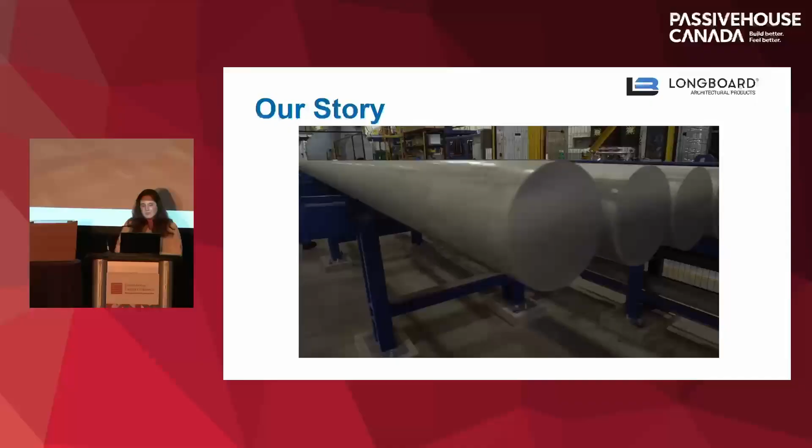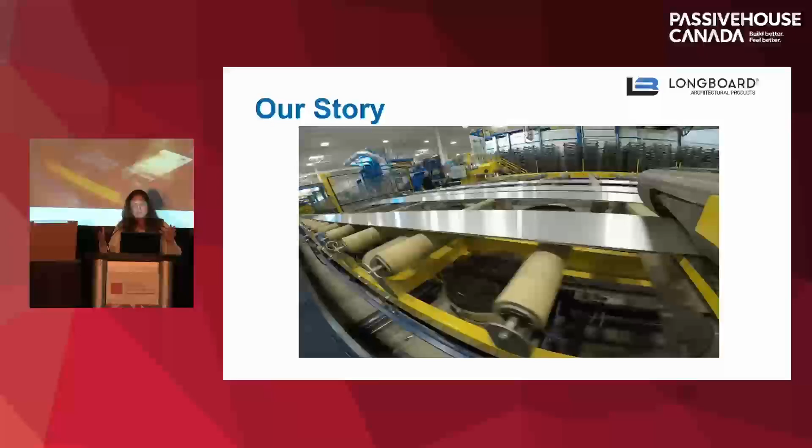This is our manufacturing facility in Abbotsford. This is the extrusion line. We get a log of aluminum, we cut it into billet. The billets get heated up and they go through an extrusion line. On the other side, we have the extrusion shape in 100 feet. We stretch it, we cut it into 24-feet pieces.

We powder coat everything, and the wood grain finish gets wrapped. This is the powder coating - we have a vertical paint line, and then whatever needs to be powder sublimated for wood grain gets wrapped in a film, goes into the oven, and by sublimation process we transfer this image into the planks or the profiles. So this is every step of our manufacturing process: the extrusion, the preparation - so we make sure the aluminum will receive all this powder and sublimation process and it won't come off - then the powder coating, and finally the sublimation.

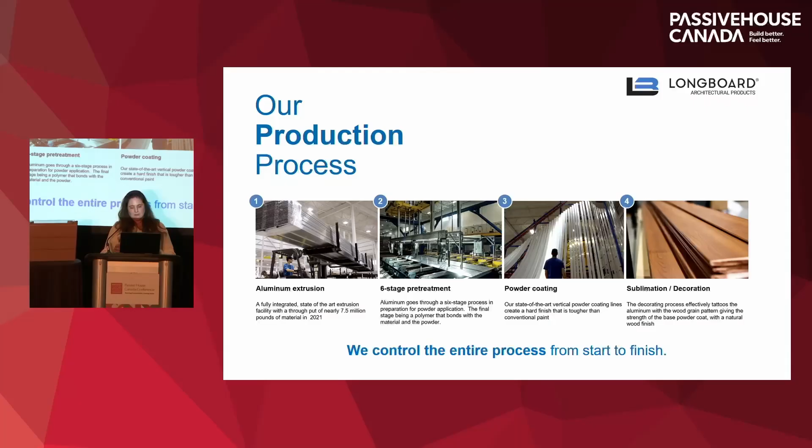All the products are ready to ship in 5 to 7 business days, and they will arrive to site within 30 days from the order. Also, orders are free shipping over $5,000, all across North America.

Longboard is uniquely positioned around sustainability. It would be possible to do an entire presentation on sustainability, but for the purpose of this presentation I just want to mention a few key takeaways. Aluminum is one of the most abundant metals in the world, while also being 100% recyclable, which makes it a sustainable option for builders and architects.

Being fully recyclable, our cladding would at least be fully recyclable. We also offer a Longboard Eco option, which has at least 50% recycled content. We also have EPDs and LCAs for all the product lines. With all those, you can get LEED points such as materials and resources, energy and atmosphere, and also indoor environmental quality.

So like I mentioned before, Longboard Eco will have the same quality, the same warranty and everything, but with at least 50% recycled content. All the products are 100% recyclable, they have EPDs and LCAs, and they are VOC-free and chrome-free.

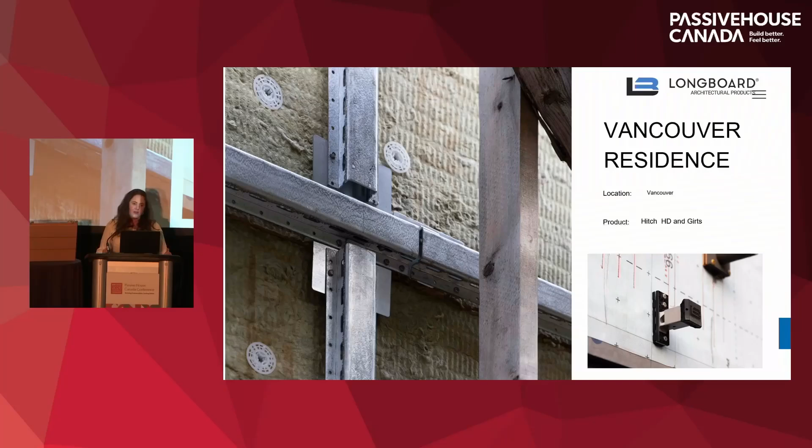Here's a comparison between using the Hitch attachment system, another attachment system where the girt might penetrate insulation, and a Z-girt, which completely penetrates insulation. You can see the blue shading represents the heat or cold you're losing through the envelope using different attachment systems.

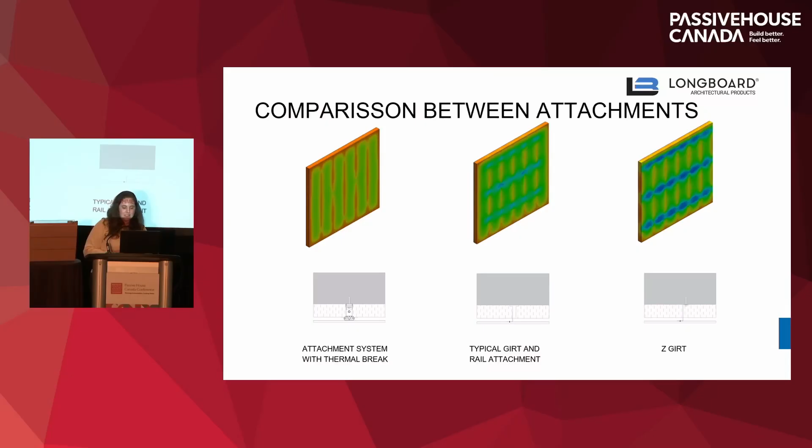Some of the profiles we manufacture - as I mentioned, the T&G, tongue and groove profiles, are our most popular, available in 4-inch, 6-inch channel, or 6-inch smooth. Pretty soon we'll also have available an 8-inch V-groove profile.

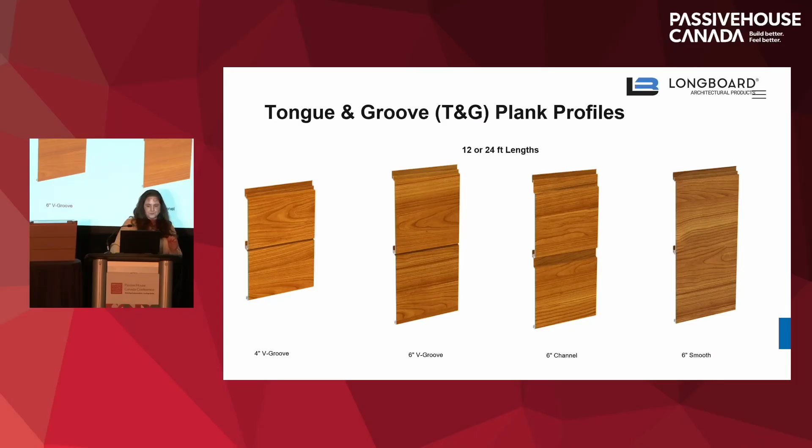We have all the trim components in the same wood grain or color, matching the profile to accommodate expansion and contraction, and also to finish the edges of the wall, under the window, and the top of the wall.

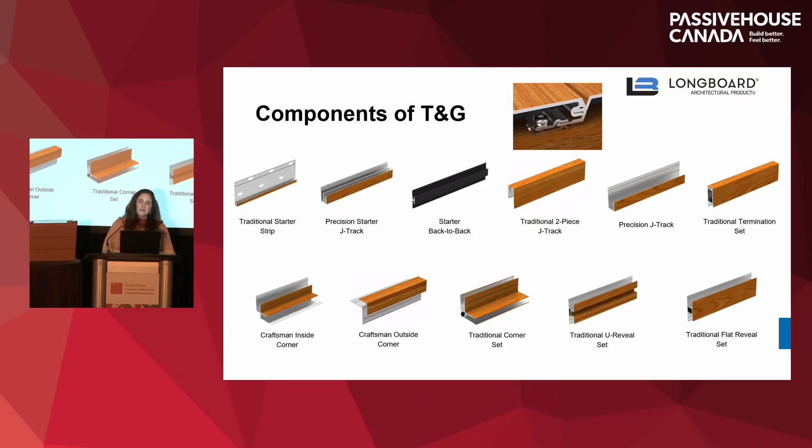Something unique about our system is our quick screen clip. With the quick screen clip, you make sure your plank is offset from the wall by around 1.5 millimeters. This allows water to run through and actually creates a rain screen system.

We offer all the profiles in a wide variety of wood grains, solid colors, speckle finishes, and natural aged metals. We also do color matching. We have, of course, a minimum order, but we can do any solid color or wood grain.

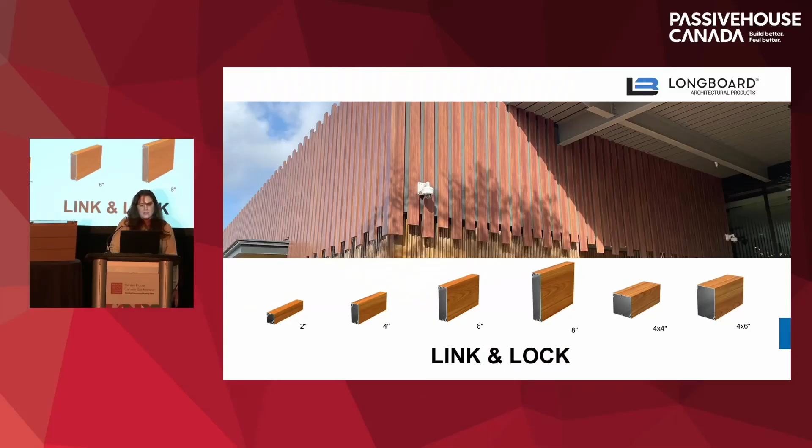The link and lock, which are a 2-piece batten, can also be installed outside or in interiors, in a batten or fin application.

We have different mounting clips and end mounts to allow for floor-to-ceiling applications, maybe a pergola. You can also install it on an angle to create some shading.

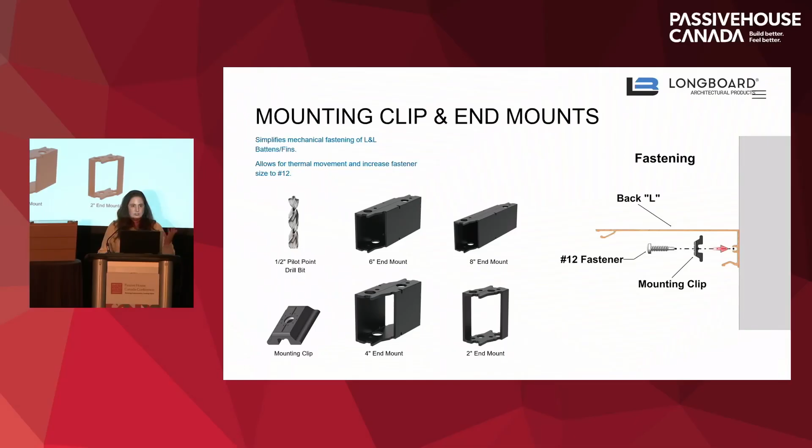This is our ceiling system for interiors only, where we have 4 or 6-inch baffles that can be installed with our hanger brackets, or they can also be installed directly to your T-bar if you use the smaller clip.

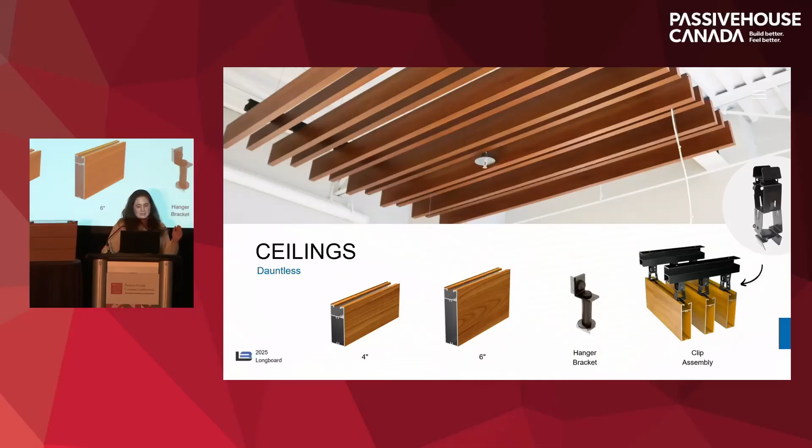Locally here, we have this installed at Equinox Gym in Vancouver, where you can see the dauntless system.

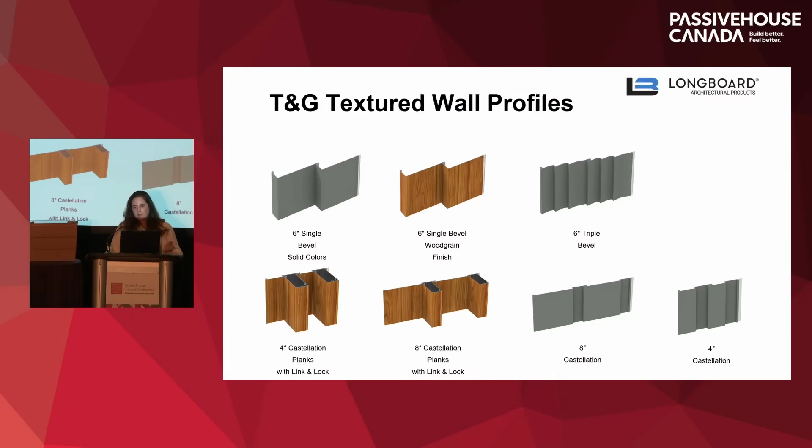Our latest addition, I would say, is the T&G textured walls, where we have single and triple bevels, and castellation, which can be used with or without our battens. A couple of examples: we have the All Modern project with single bevel, and Montana Museum with castellation and link and lock.

Something that also differentiates us from other manufacturers in the market is all the testing we have available. Everything is on the website for you to check and download.

On the client care side, we have a dedicated rep in your area, a technical team that can do material estimates, shop drawings, and also our technical library.